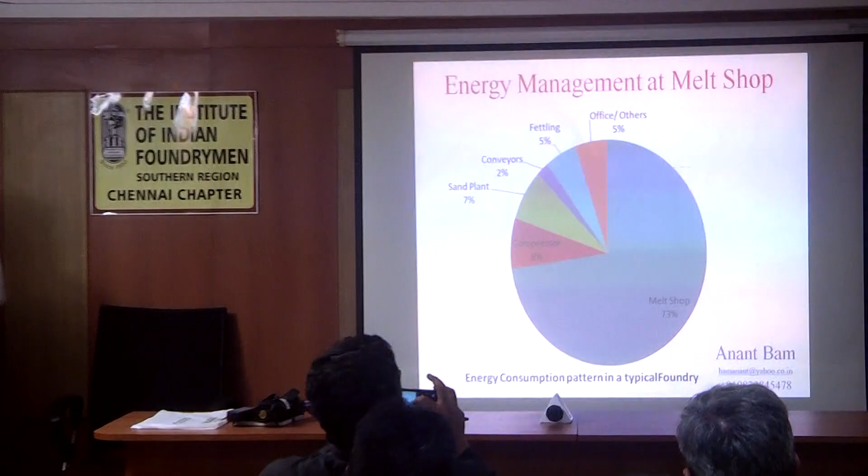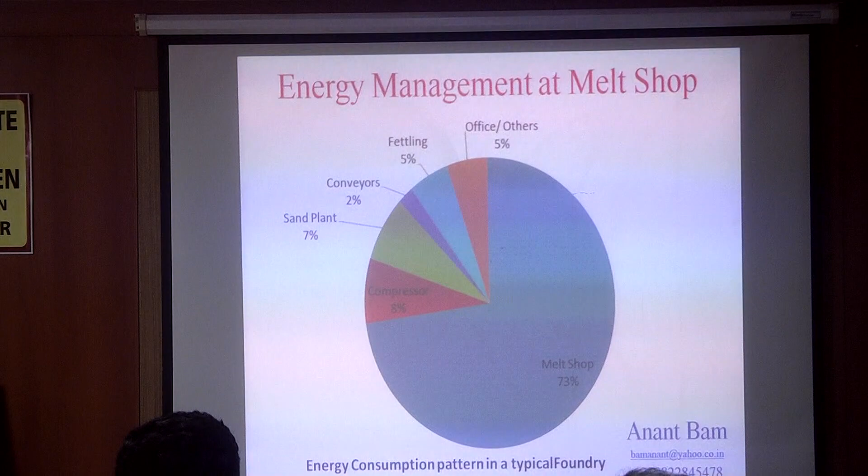Usually there is a misconception that whatever units are consumed for liquefaction are recorded on the panel. No, sir. To run the panel, there is energy requirement. To keep the furnace cool, there is a pump house. To cool that water, there is a cooling tower. All these things together contribute to the melting energy.

So as we have seen, melt shop is a low-lying fruit because it's a 73% contributor to the total energy consumption. So if we can save something here...

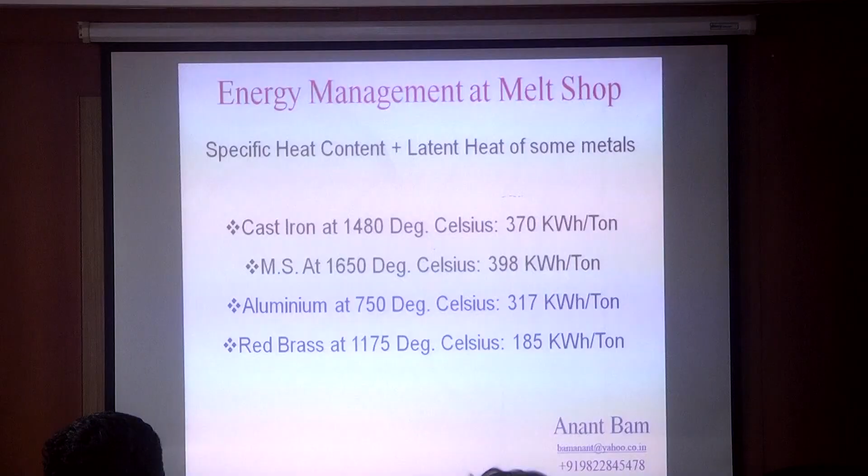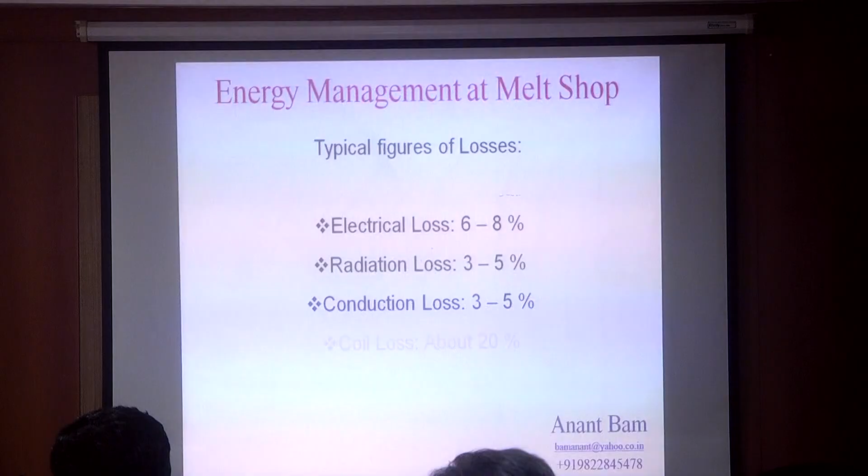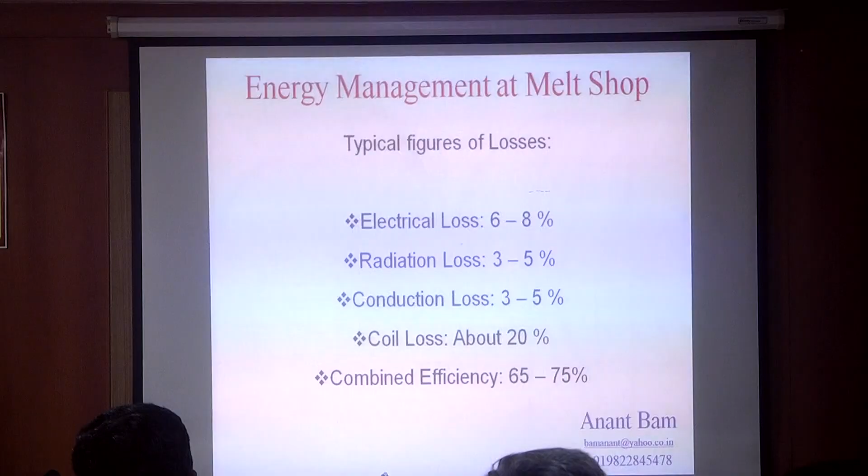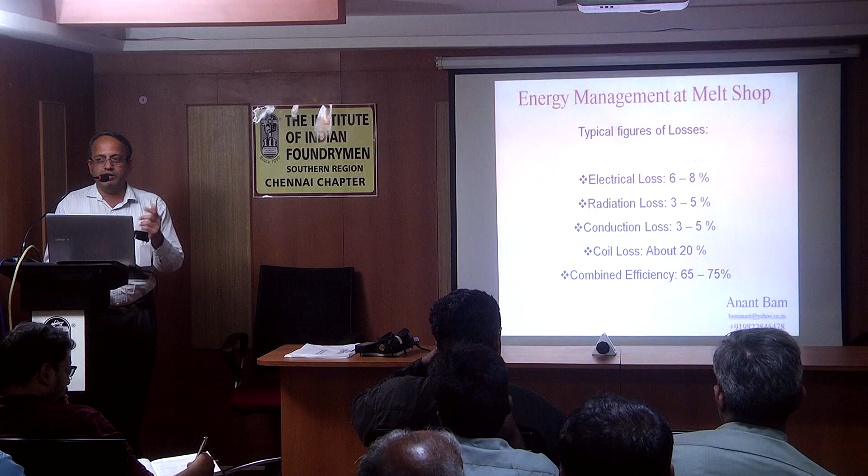So where does the remaining energy go? Because even in the most efficient foundry, figures are 200 units plus. Electrical loss 6 to 8%, radiation loss 3 to 5%, conduction loss 3 to 5%, coil loss about 20% - this goes to the cooling water. Combined efficiency becomes 65 to 75%. Add to it the energy consumed by the pump and cooling tower fan. Because electrical loss here means the loss in the panel itself, but to run it we need these two auxiliaries - the pump house and cooling tower.

Lining condition. First of all, there are two aspects to it: quality of lining and lining condition. Lining takes up 8 to 10 hours during sintering, so forget about production loss - the energy consumption in lining or sintering is equivalent to nearly 3 heats of energy consumption or more, but it can be done in as minimum as 3 heats. So you are wasting energy for 3 heats and probably a production loss of maybe 8 or 10 heats. That is a tangible figure. Production lost, you cannot cope up again - you have to work hard and hard to come to that figure. So you can quantify that and then allot it to the number of heats sustained by the lining.

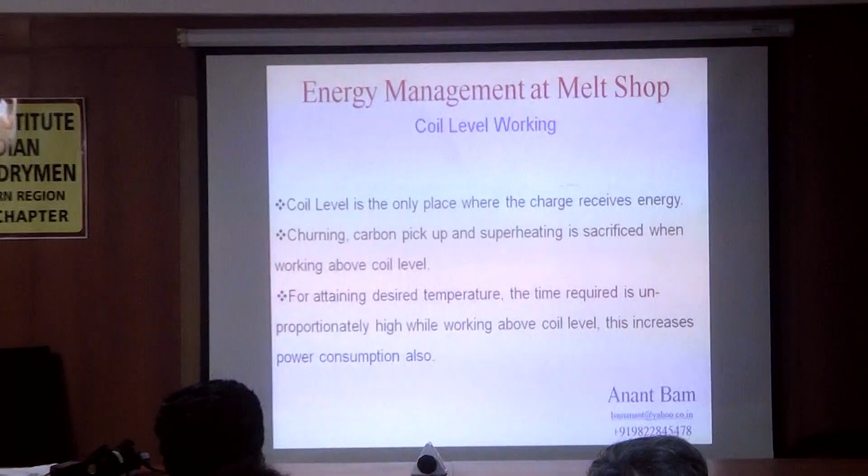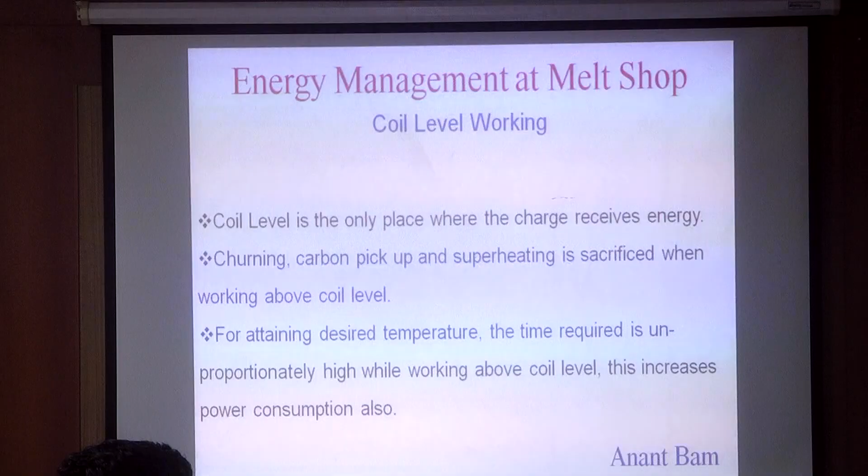Coil level working - that's the only area which receives energy, not below it, not above it. So if your coil is placed much above, the bottom remains cold. If you are charging too much metal by raising your crucible height above the coil, that remains cold, and the energy is received in the middle.

So whatever is within the coil, it receives energy efficiently. And if you try to increase your holding capacity or dispensing capacity by raising the lining height, then you are not only delaying the heat, you are also consuming more energy. Occasionally, to adjust one or two odd jobs which really require 100-200 kg excess metal, it's all right. It's pardonable - but I again use the word pardonable, not acceptable.

So it's a commercial decision. Instead of holding and doing something else, you can raise it for maybe 100 kg or so. But don't make it a practice.

Charge material - again, it's a commercial question, I would say techno-commercial. Clean charge material gives you best results, because unclean charge material - dirt, dust, oxide, whatever it may be, grease, sand stuck to the runner riser - it's something else which you don't want in liquid metal. It's occupying the volume of furnace. It's taking energy from the electricity which you are supplying to take it to that temperature, because specific heat capacity of sand is larger than specific heat capacity of iron.

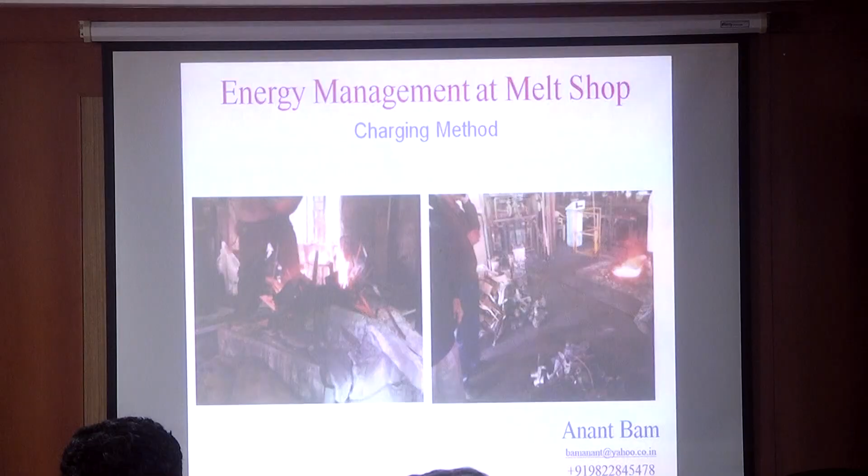The photo on the left hand side is loose scrap being charged. All these photos are not from Chennai, these are old photos when I was conducting Urja Sanchay 10 years ago. Wherever needed, I will take the name of the foundry which allowed me to do that exercise.

Cold start cycle. Mr. Venkat will be talking more on it. But if you cool the furnace fast, the cracks developed are shallow.

So it is ready to heat up fast. So your cold start cycle timing reduces drastically.

As against, if you allow the furnace to cool gradually, the cracks which develop are quite deep, so those cracks take a longer time to seal. So naturally your cold start cycle timing increases. Again, that's a time loss and energy loss.

Luckily, I could have a comparator - what was the cold start cycle before creating awareness in my last Urja Sanchay, and what is the cold start cycle now. This foundry number belongs to those particular foundries which were selected 10 years ago, which were repeated last year.

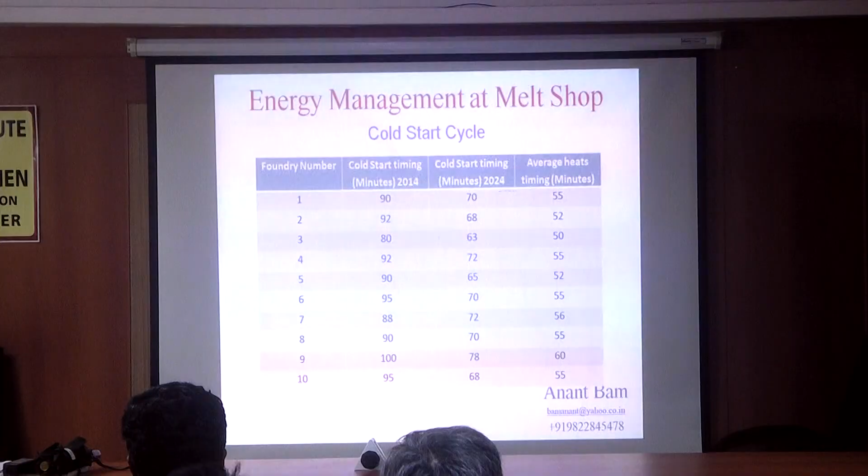So the same foundry, same panel, people have changed - maybe the melters do not remain at one place for more than 2 years. But the practices change. After educating them, you can see the average saving in the timing.

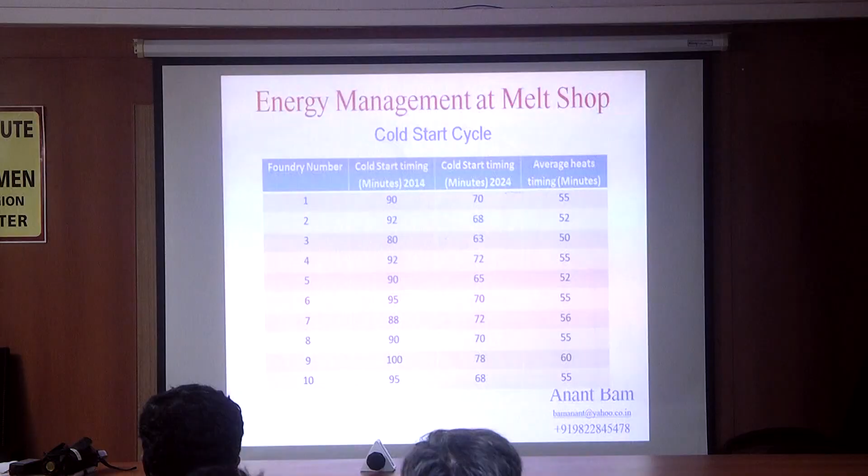Superheat - 10 degrees, 3 units. Keep it in your mind, every 10 degrees, 3 units more. Do I really need to superheat?

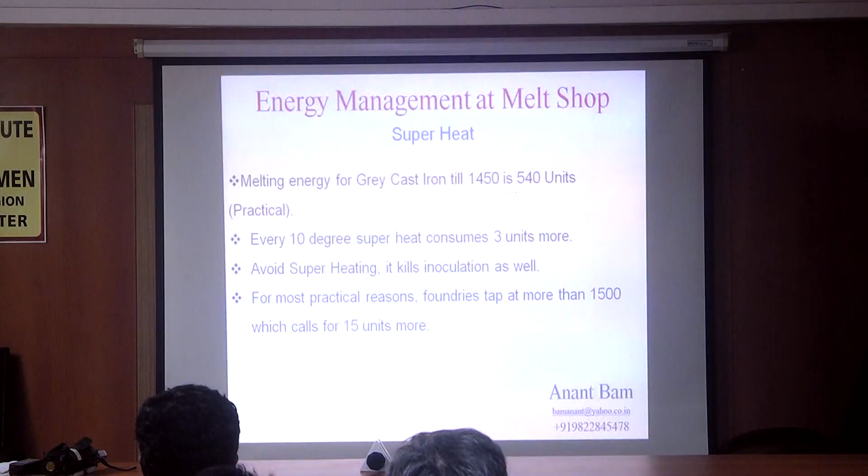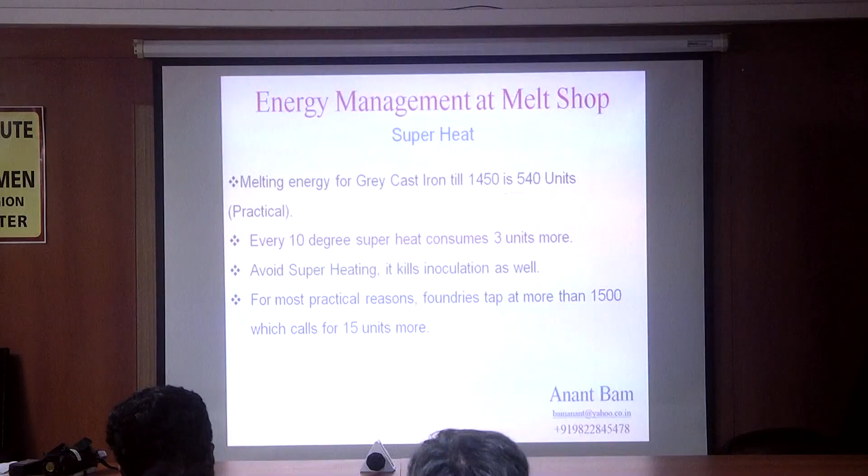What's the need? First is loss in transfer. Can I preheat the ladle? Certainly yes. That will reduce the need of superheat.

Can I reduce the travel time? Certainly yes, that will again reduce the need of superheat. Can I cover the ladle? Certainly yes, that will prevent radiation loss.

Sometimes superheat is necessary, but then take care of it by preheating the ladle, by minimizing the travel distance, and by always covering the ladle.

Excess holding time - 10 minutes holding, 20 units extra, 2 units per minute. In this visit, this was an example I gave to people. There was a debate, but later on they agreed to it - yes, we can do something about it.

And you go on reading all these reasons - can it not be avoided? Certainly yes, if it is a team effort.

But what happens? Today in every foundry, melting shop is enemy of molding shop. Core shop is enemy of both. And production planning person is the villain.

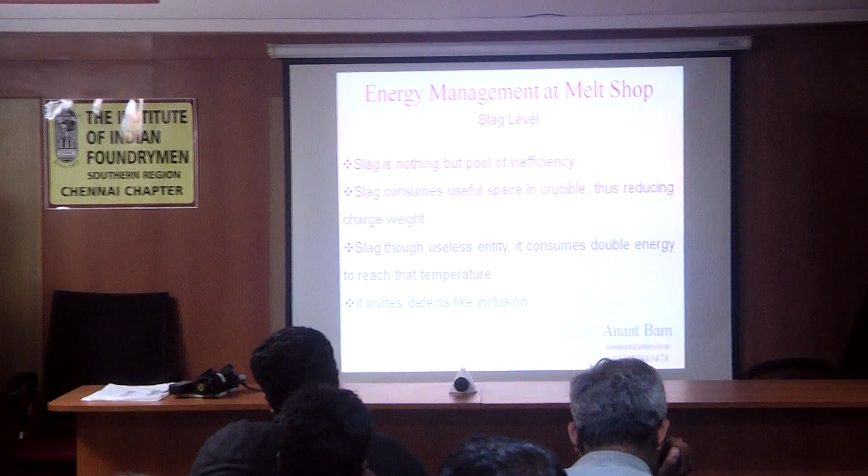Recipe - what's there in the tadka? Oil, then what? Fennel seeds, mirchi, spices, onion, potato - end of it. What do we have in our tadka? Liquid metal, ferrosilicon, ferromanganese, copper, tin, chrome. End of it.

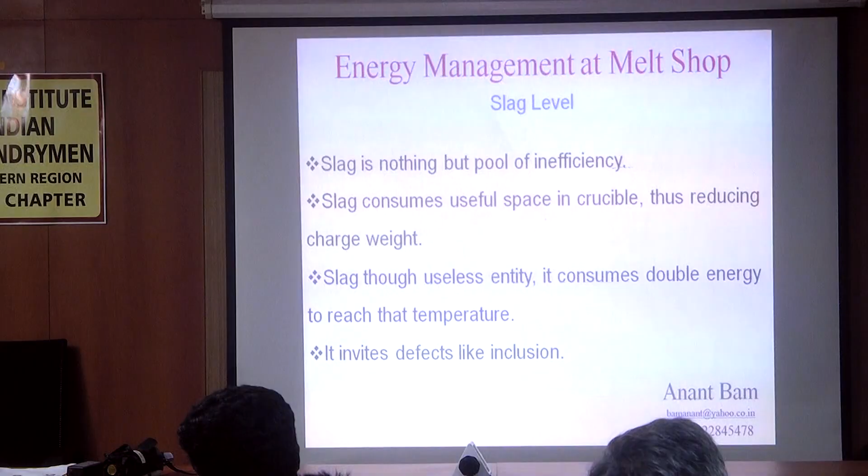If that lady can take care of her percentages, why not we? She is not supported by a PC or a spectrometer. We are. But even then we fail. Learn from it.

Before thanking, I would like to share my first-hand experience about this visit. I could find lakhs of units being wasted that could be saved just by preventing compressed air leakage. What does it call for? Awareness. Remember, a 1 mm hole in a compressed air line leads to 2 CFM loss.

And while at lunchtime, if I am walking through the shop floor, I can hear hiss, hiss, hiss. What's it? What for?

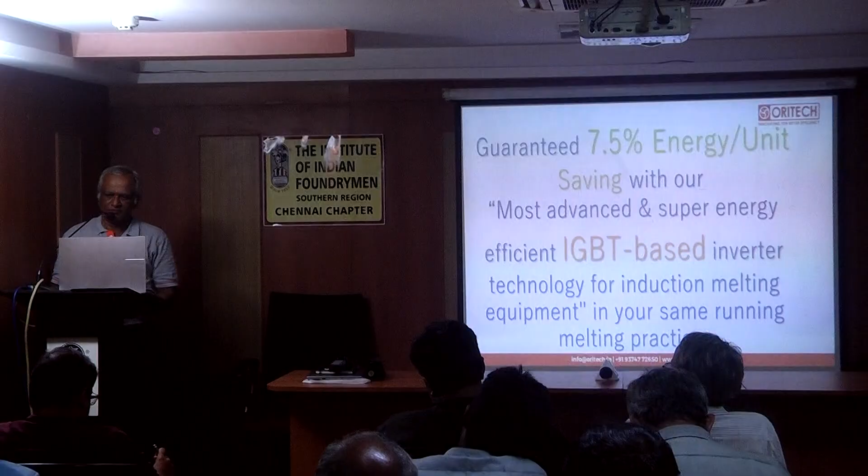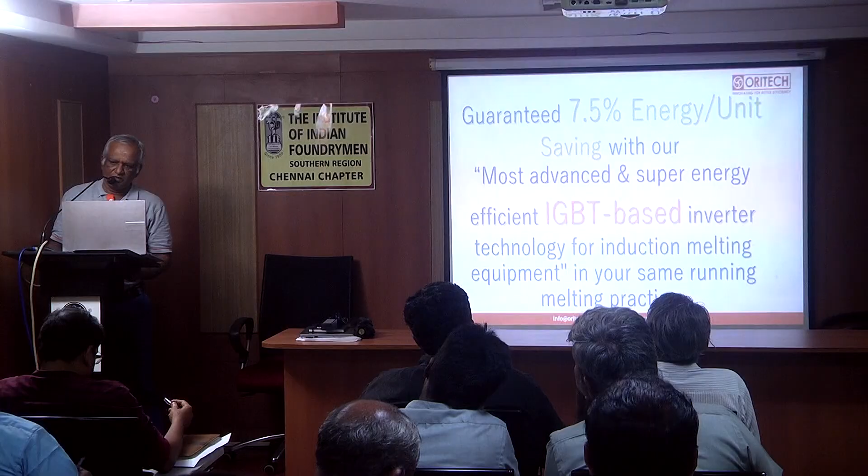Thank you for this good evening and a wonderful opportunity. This is Oritech. We started our company in 2006, and now we have more than 350 to 400 installations. We started our company with IGBT technology. Our USP is a guaranteed minimum 7.5% energy saving with your existing melting practice. We are achieving this through our technology, design and concepts. I want to discuss and explain all these things.

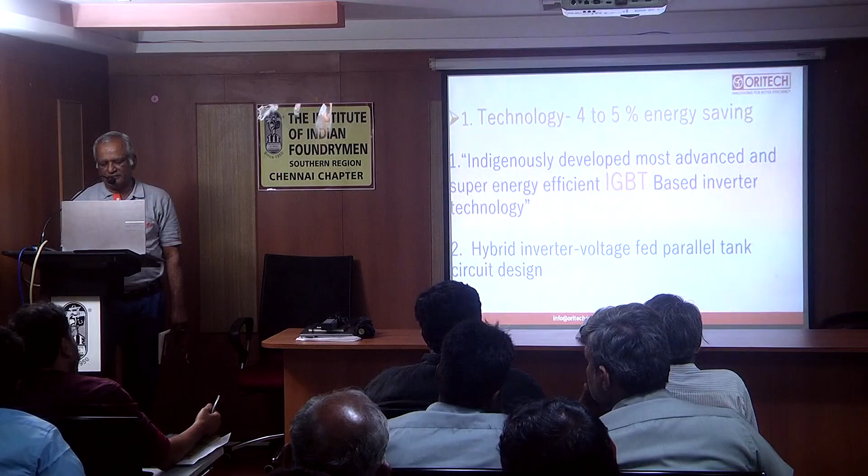We are using IGBT technology, which is very fast switching compared to SCR, and we are also making hybrid inverter technology. In the world, this is IGBT - insulated gate bipolar transistor. What is the difference between IGBT and SCR? SCR is silicon controlled rectifier, and it is controlled by current. IGBT is voltage controlled, meaning like a switch - you don't need any snubber, you don't need any turn-off time. Through IGBT technology, we get speed switching power of more than 100 kilohertz.

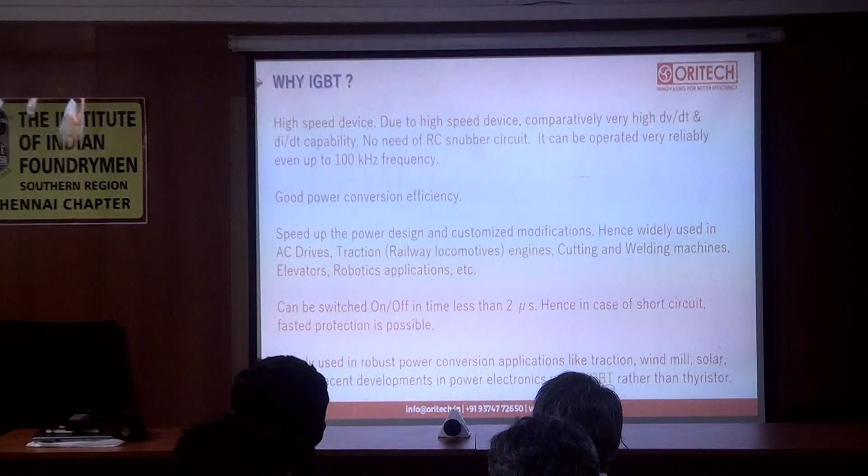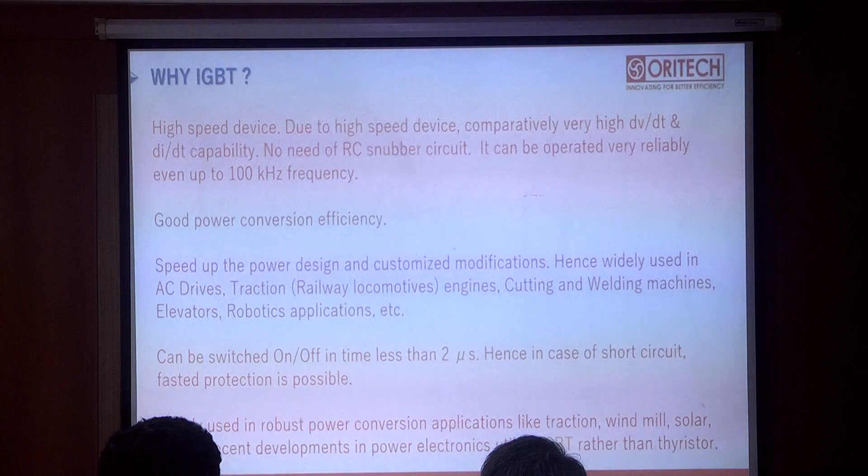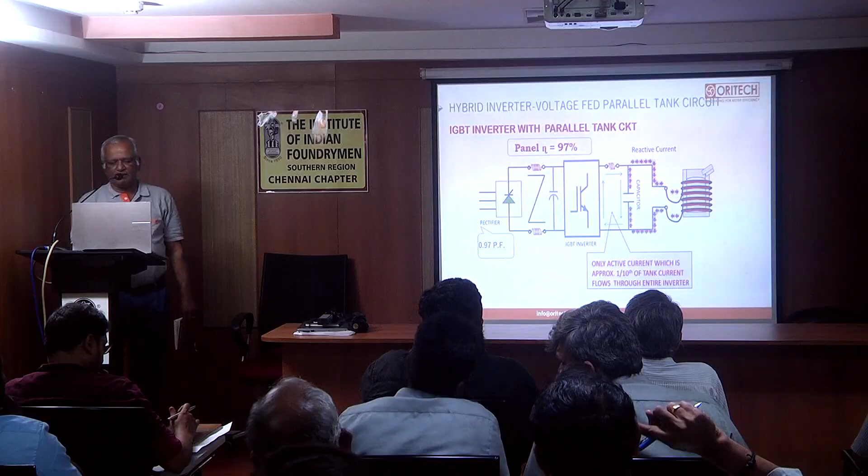With this speed switching technology, we have also introduced DSP technology - digital signal processing. The IGBT has 100 kilohertz switching power. We are switching the IGBT at more than 100 kilohertz, and with that we are controlling the power. This is our inverter power circuit.

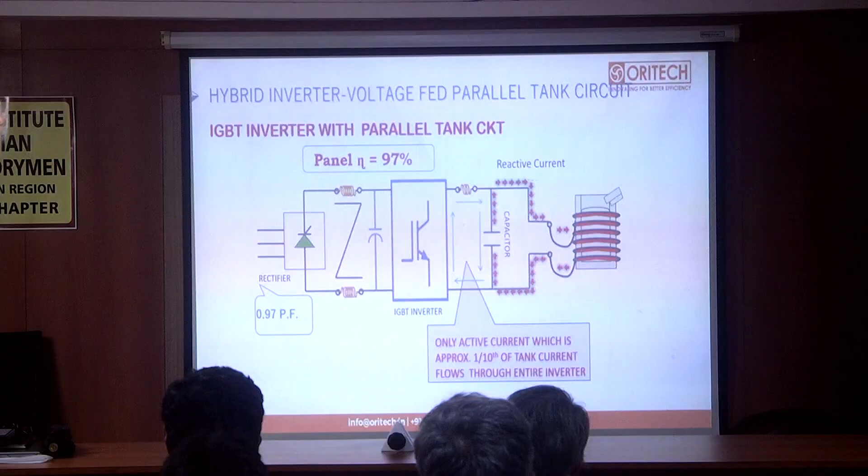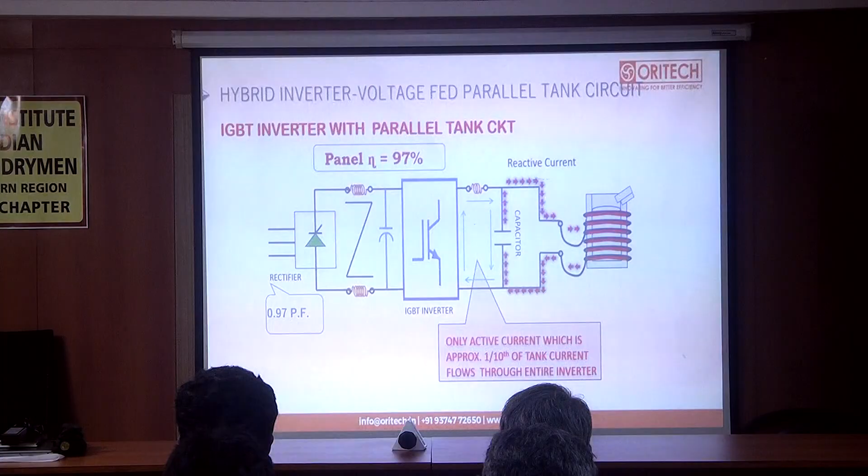In the world there are only two technologies: current fed and voltage fed. In current fed, we are controlling DC voltage, so it affects our power factor. Whenever you reduce the power, operating with less power, you get affected power factor as well as harmonics - generating more harmonics. In voltage fed technology, the DC is switched on and they control the power through frequency.

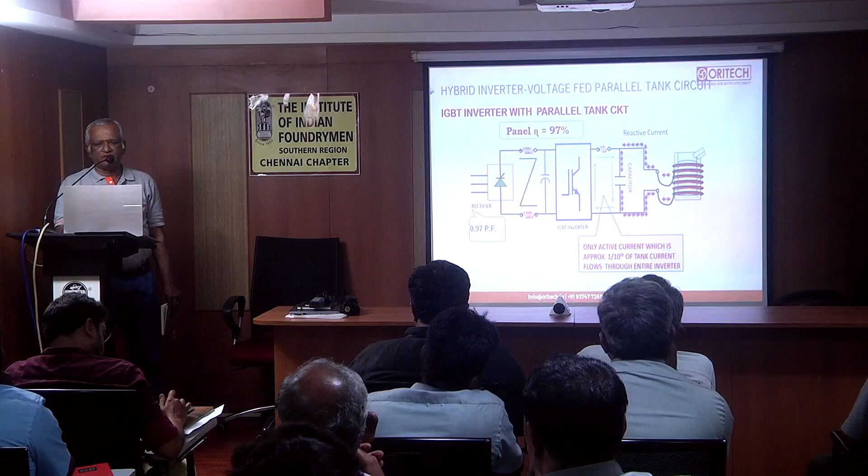So you see the benefits of Oritech hybrid inverter design. I already told you the types of inverters we have: voltage fed, current fed. How is it working? Hybrid technology.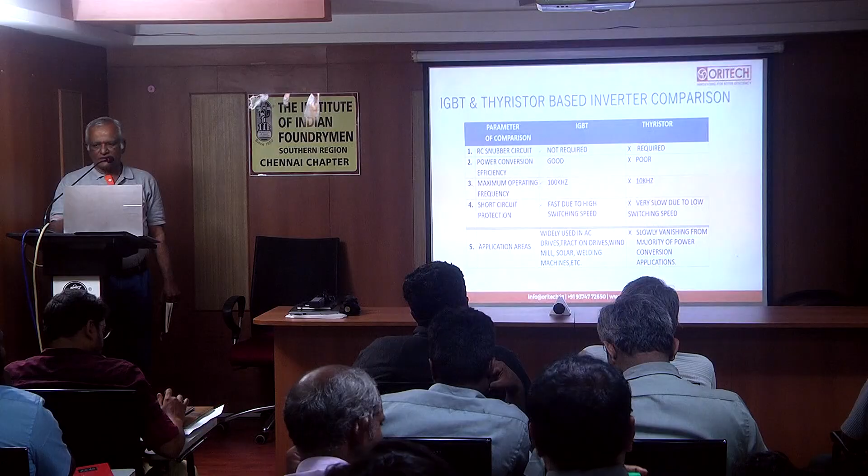What is the difference between IGBT and thyristor? Thyristor requires an RC snubber - it wastes power. Power conversion efficiency is more in IGBT because we don't need a turn-off time circuit, and it operates at very high frequency. Short circuit protection is very good because we use DSP technology. That's why IGBT is used nowadays in Vande Bharat trains, as well as every AC drive, every welding machine - everywhere we are using IGBT.

Through this technology we are saving a minimum of 2 to 2.5% energy.

Now our layout - you can see many more furnaces, many more power supplies, and lots of copper bus bars going through here and there. As already mentioned, we have very heavy I-squared-R loss because of frequency as well as the bus bars, so it heats up and we have a lot of loss. To reduce that loss, we shifted our reactive power near the coil.

In our panel, up to 350 kilowatts we are not using water cooled cable - only air cooled cable. For very big furnaces, more than 5 ton, we use only 1.5 meter of water cooled cable. With water cooled cable, you get more than 6% power. Here you see our installation - very neat and clear, no bus bars, nothing here.

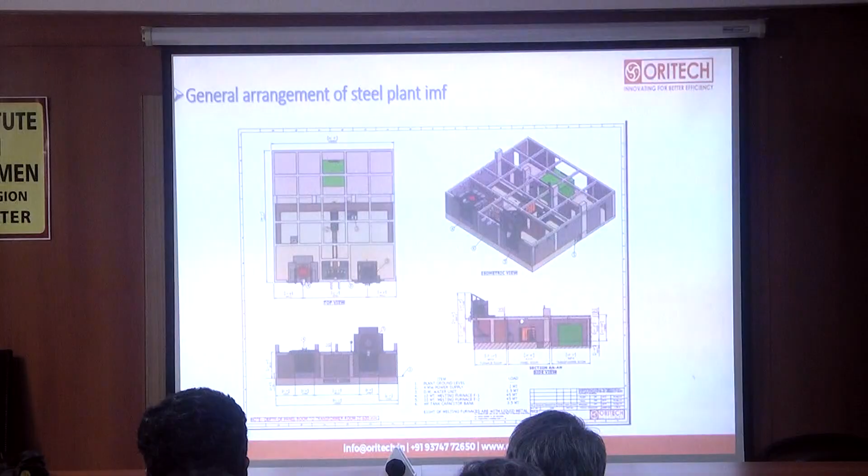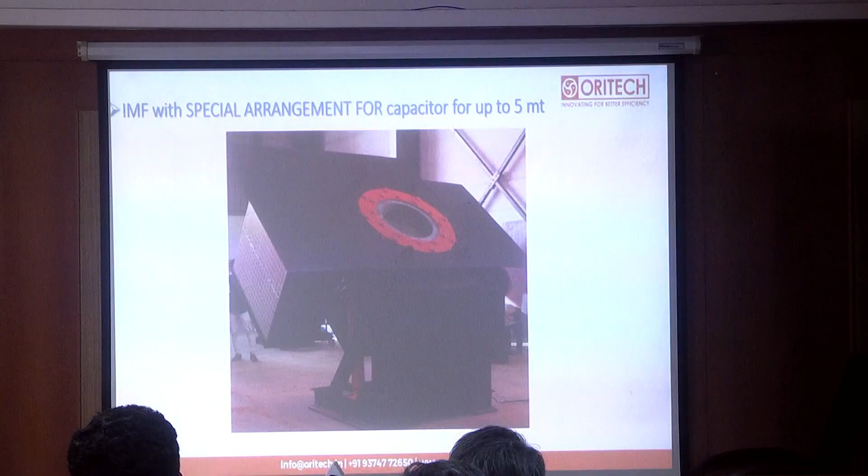This is our furnace. Our furnace is combined - all the furnaces, steel frame furnace combined with tank capacitor. Because of IGBT, we are making the parallel tank circuit near the coil, and that's why we are saving energy through saving reactive power. Since all panels contain their tank capacitor inside, instead of using longer copper bus bars and trench bus bars which cause more I-square losses, we are putting our capacitor parallel to the furnace. So there is no need to worry about component failure or water-cooled failure, and it gives very less maintenance.

Build quality saves 0.5 to 1.5% energy. Here, from 500 kg, we are making steel frame furnace only, not box furnace, because with a box furnace we cannot save energy. Due to using the core, we are saving 1.5 to 2% energy. But with a normal core, we can save maximum only 0.75 to 1% energy.

We use the same CRGO core but with high quality - our competitors are using only 125 rupees per kg core, but we are using 400 rupees per kg core. That is called amorphous core. Amorphous core means it acts at very high frequency and works very efficiently. We are using amorphous core, which is very thin.

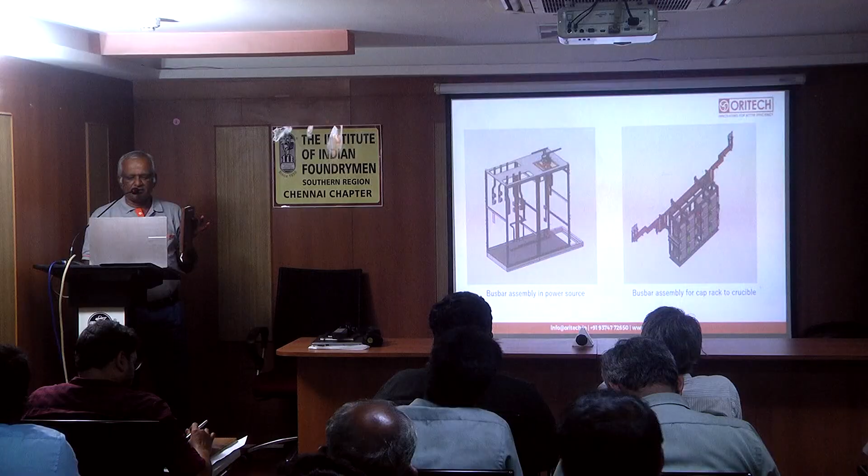In our furnace, if you see, there is no cooling at all on the core side - inside the core there is no cooling. But if you see any other furnace, any other kilowatt steel frame furnace, they definitely provide cooling side copper plate. Through this, we have reduced our bus bars. Here we have assembled the panel bus bars - inside the panel, these are all the bus bars, and this is our capacitor, tank capacitor assembly.

So sir already told about the radiation loss and other losses. Through this, we guarantee a minimum saving of 7.5% energy. But if you do more practice with this existing advice, we can save more than 10% energy. 7.5% energy means for 500 kilowatt, minimum 36 kilowatt hour per ton we can save per melt, melt to melt.

Now we are installing our panel - 6000 kilowatt, 6000 kg dual track furnace in Sandfits, Coimbatore, which is a cast iron foundry. And at Kejriwal Industries, Kolkata, they are achieving 490 units kilowatt hour per ton through our 5 ton, 3000 kilowatt dual track unit.

So we may be new, but we are doing a lot of work. We have more than 350 to 400 installations in steel plants. Now we have more than 10 orders around Coimbatore in steel plants, but we need opportunity in foundry. And we are also supplying dual track IGBT to Kirloskar Ferrous.

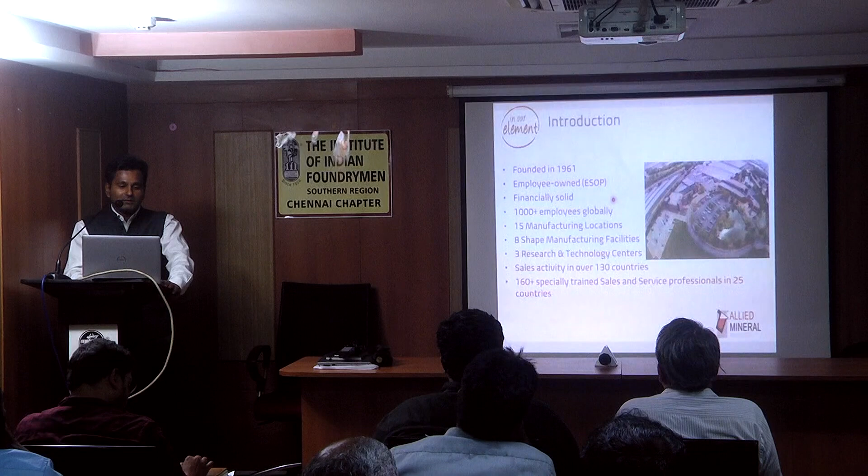Our company introduction, Allied Mineral Products, has been founded in 1961, and it's an employee stock ownership program company. It's an ESOP company, financially solid, and we have 1,000 plus employees globally. We have 15 manufacturing locations. Recently we started a manufacturing location in Turkey, and we have 8 shape manufacturing facilities around the globe, and 3 R&D centers, and actively sell over 130 countries plus, and we have 160 plus sales representatives along the globe.

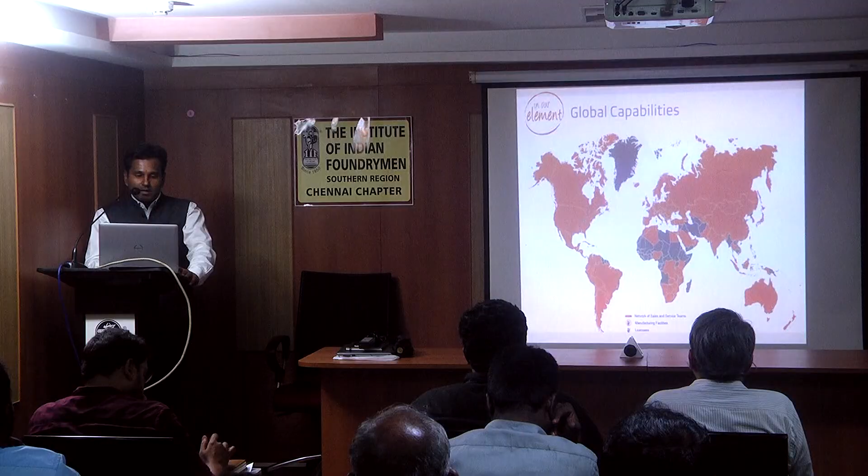This is just a pictorial representation of our company's presence over the globe. As you can see, we are present in almost every country. These locations are our manufacturing and licensing locations.

So what is the relevance of lining life and energy saving? As Anand sir has explained, optimum lining thickness always gives you better energy saving. So increased lining life reduces the overall power consumption of the throughput. As I said, sintering heat consumes three times your regular power consumption of your regular heats. So if the lining life is prolonged, this additional sintering power is distributed over the extended lining life.

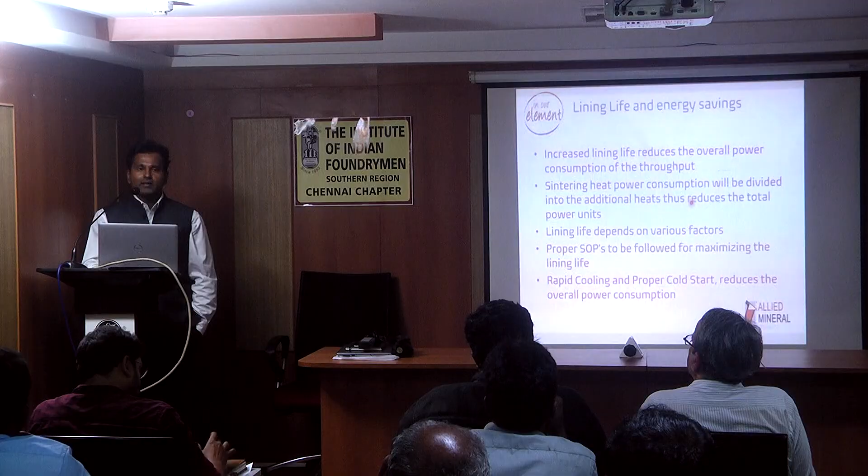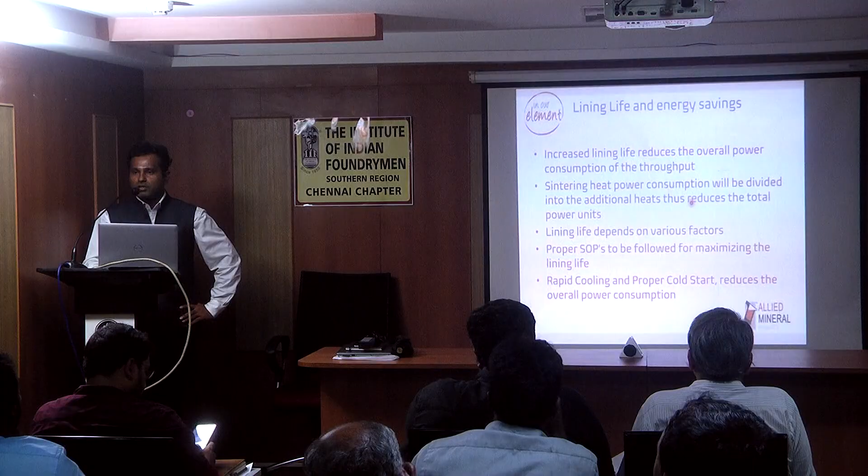Lining life depends on various factors, so we cannot have a constant lining life even in the same foundry. Lining to lining life differs, and company to company, foundry to foundry lining life differs. It all purely depends on our practice, how we handle the lining efficiently. If we properly follow all standard operating procedures, we can definitely maximize the lining life and make the maximum out of the lining. A rapid cooling and a proper cold start - these are the two things I will be discussing in further detail.

I've just kept 2-3 segments instead of going completely deep. If we consider these 3 parameters, we can have maximum life. One main thing is grout lining. Grout lining is generally not given the importance it has to be given.

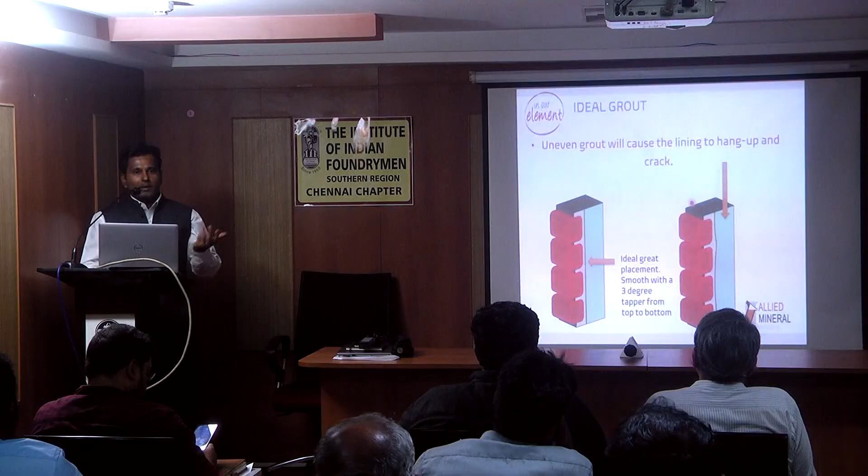What is the purpose of grout? The purpose of grout has two main purposes. One is to give smooth expansion and contraction for your main working lining. Second, it insulates in between the coil. Ideally, the grout has to have a 3-degree taper from top to bottom, and it has to have a very smooth surface.

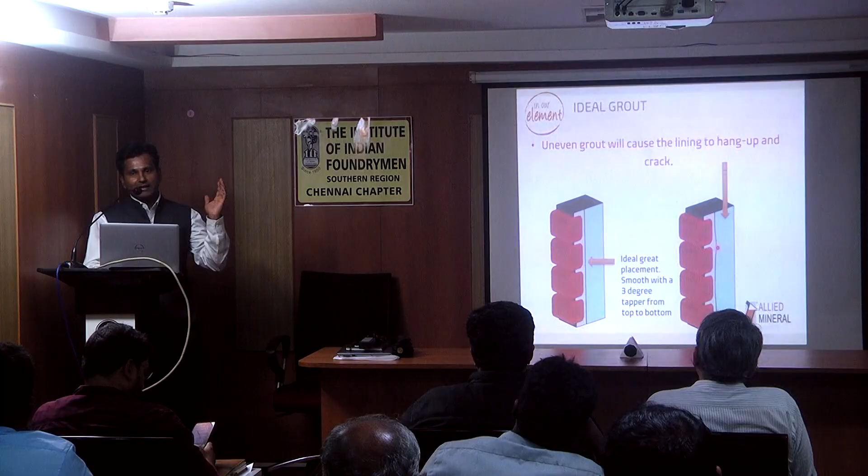If your grout is not smooth enough, if it has any ups and downs, when the lining tries to expand, it gives stress to the lining, and further it gives cracks to the lining. It will reduce your lining life. I've given one example of a bad grout.

Here you can see these are all the lining hang-ups when lining tries to expand and contract. From the back, it will try to create stress. Further, it will have a horizontal crack. A horizontal crack may not be sealed even though you do a proper cold start. Only vertical cracks or through cracks can be sealed if we do a proper cold start.

The second thing is spout lining. Generally, the spout is lined with a different material rather than the working lining. Either sodium silicate or some other binder will be added, and it will be placed after doing the lining. We recommend doing the spout ahead of the lining. This gives you two advantages. One is that your joint is shifted from this particular location to this location.

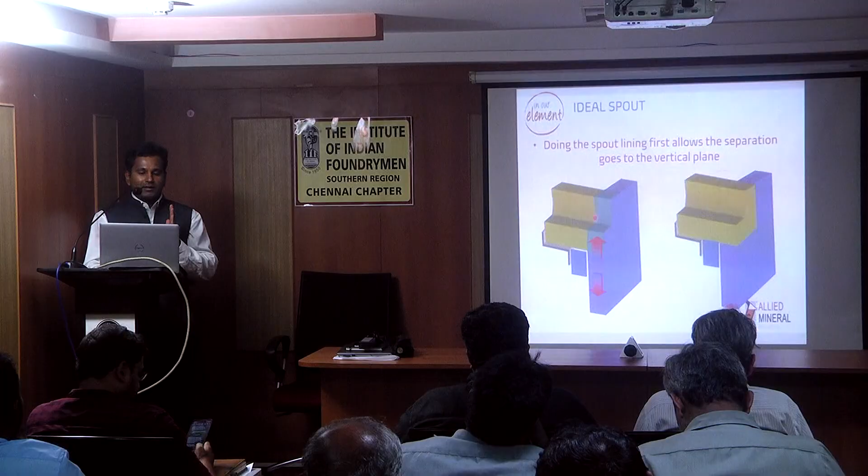We call it a vertical plane design. So now in the vertical plane design, these two have become completely different entities. When the lining tries to expand and contract, it will not disturb your spout. In the other case, in general conventional practice, people put spout lining on top of the main working lining. Spout refractory and the main working refractory have different expansion rates. When the main working lining tries to expand, it will try to push the spout lining, and when it contracts, there will be a separation, so it doesn't seal properly because of the expansion ratio.

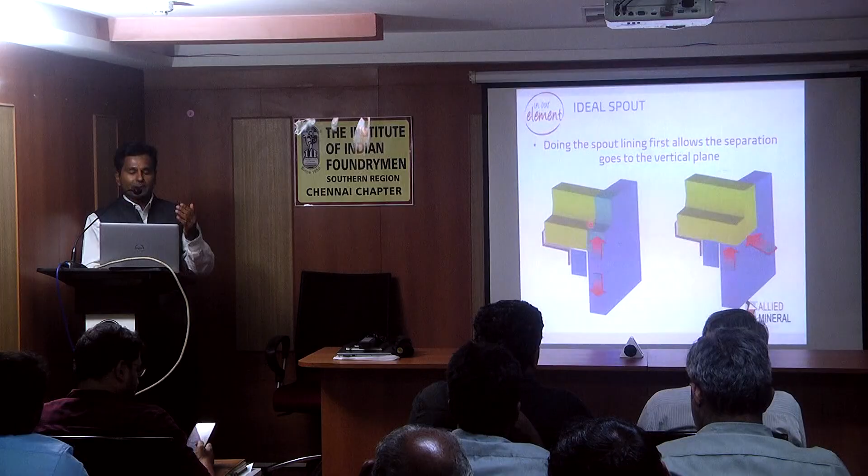So what happens is this particular joint is always in metal contact. There are high chances of metal getting penetrated through the spout and main working lining, giving you a GLD trip. So if we do the spout early, the joint is shifted from here to here, so there is less chance of metal getting penetrated through the spout to the coil.

In these two pictures, you can see the difference between the vertical plane design and the other design. Here the joint is very clearly visible. We can even patch it even though metal is present inside. In the other case, you have to completely demolish it. From a maintenance point of view also, this particular design is always safer.

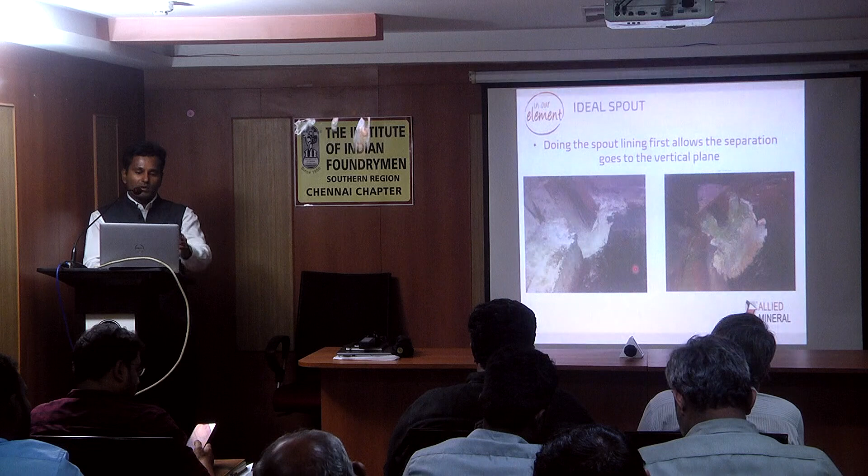We recommend a plastic refractory with a chrome oxide addition. This chrome oxide will give you the added advantage of non-wetting properties, so the metal and the slag don't stick to your spout, and even if the metal is getting solidified, you can easily remove it without damaging the lining of the spout.

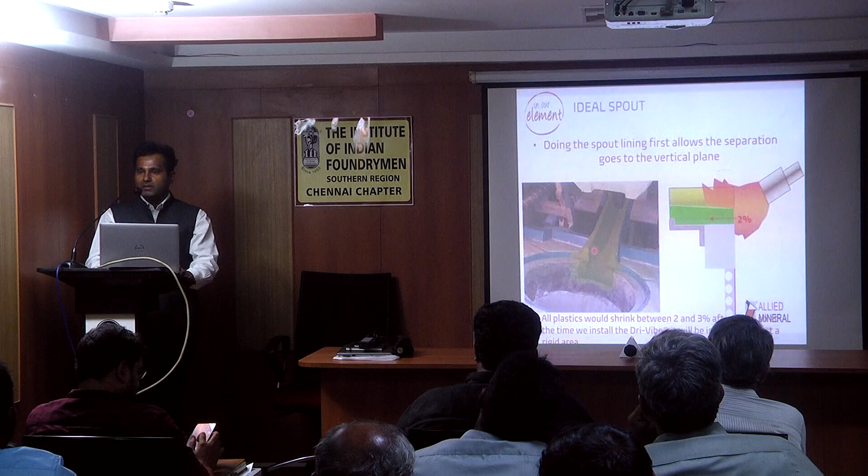If you use a plastic refractory, it always has some moisture of 2 to 3%. This moisture has to be eliminated before we introduce the main working lining. If you are not heating the spout before your lining, the moisture will affect your main working lining, and also when you try to shrink during sintering, there will be a separation because of the shrinkage. So there are chances of metal penetration, leading to your lining failure earlier.

Another aspect I would like to cover is the top cap refractory. The same way we dealt with the spout refractory, people used to do with the top cap. I've given a couple of examples. This is how generally maximum foundries will be having the top cap. They will be using the main working lining with some binders and try to form a heap on top of your top block, and because of the thermal shock from top to bottom, there will be a lot of cracks in this extended top cap. So we recommend using a dry top cap, which has an additional binder to take care of the impact of your charge and the thermal shock.

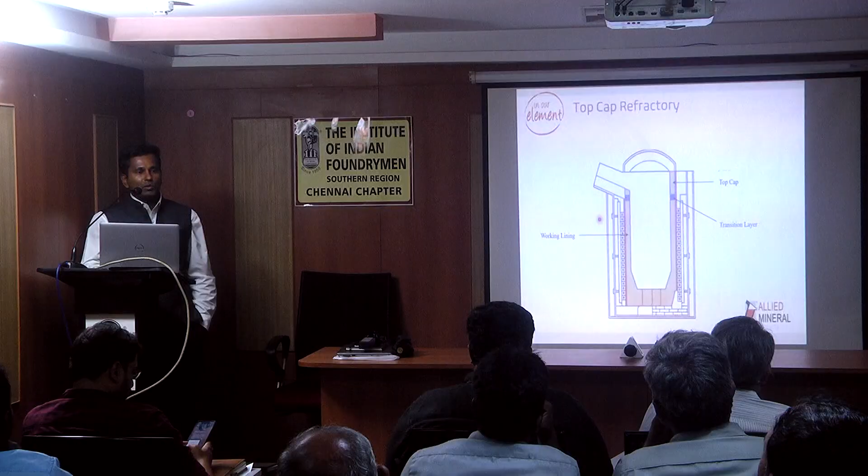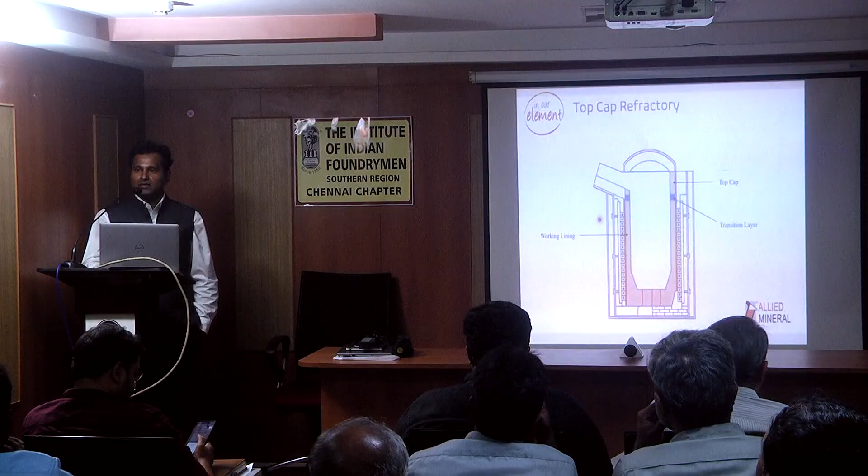This is achieved by adding fused silica. Fused silica is a better thermally stable product compared to normal silica. So with these two ingredients, we can achieve a better strength and better thermally stable top cap, even though it is dry.

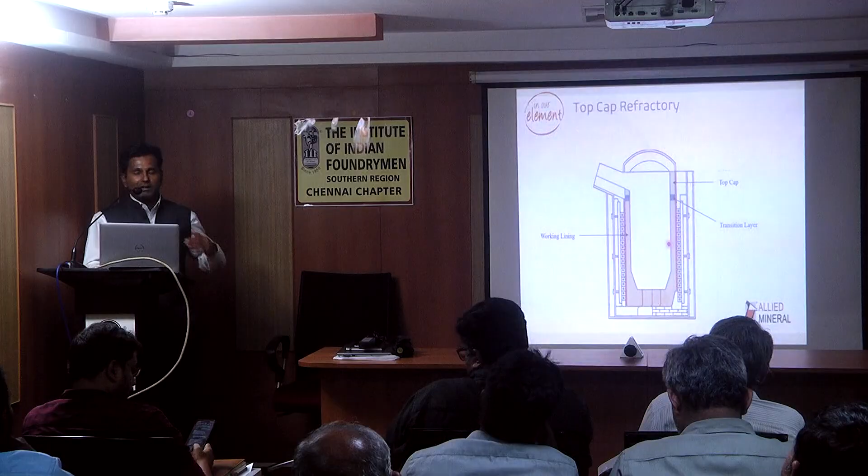So how do we have to install it on top of your power coil level? You have to make one transition layer with the special top cap and your main working lining around 2 to 3 inches, and on top of that you can install this top cap material. This will allow a homogeneous mixing from the working lining till the top block level. We always recommend having your top cap only till your block level, not forming any additional heap kind of structure on top of your top block.

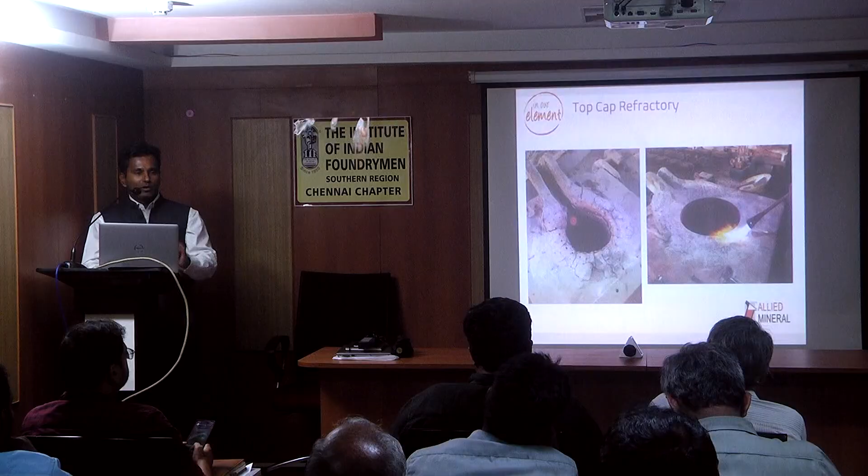Now we'll talk about sintering, how sintering will affect your main lining life. Refractory understands only the temperature, so it doesn't understand the kilowatt reading. But as an age-old practice, people used to follow the on-off cycle and slow heating cycle. But how much kilowatt is giving you what temperature, nobody knows. So we have to do an initial sintering based on the thermocouple values.

Depending upon the furnace size, we recommend either 1, 2, or a maximum of 3 thermocouples. The thermocouple has to be placed at the bottom, at one half of the furnace, and at 3/4 of the furnace from the bottom.

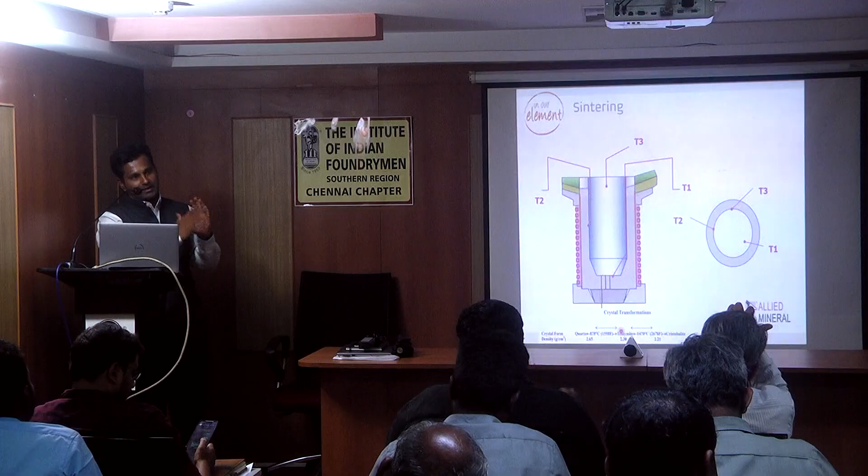We recommend 110 degrees Celsius per hour rise for the silica, and 222 degrees Celsius per hour for the neutral ramming mass. Silica has a phase transformation - around 870 degrees Celsius, it transfers its phase from quartz to tridymite. So we recommend giving a particular amount of soaking time around 900 degrees Celsius, so that it has time to transfer its phase from quartz to tridymite. And on final holding, it will transfer its phase from tridymite to cristobalite.

Sir has already given the proper numbering for how much volume a pipe and other things will occupy. Not only for the sintering, we always recommend having a densely packed charge to draw more power instead of power wastage.

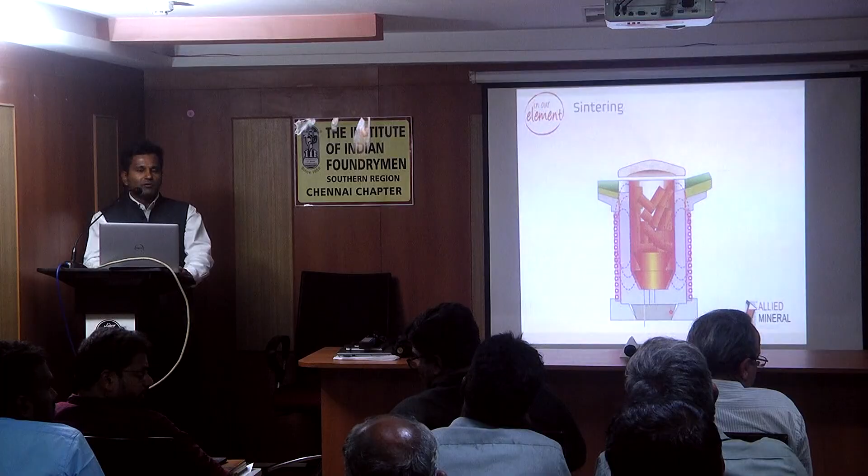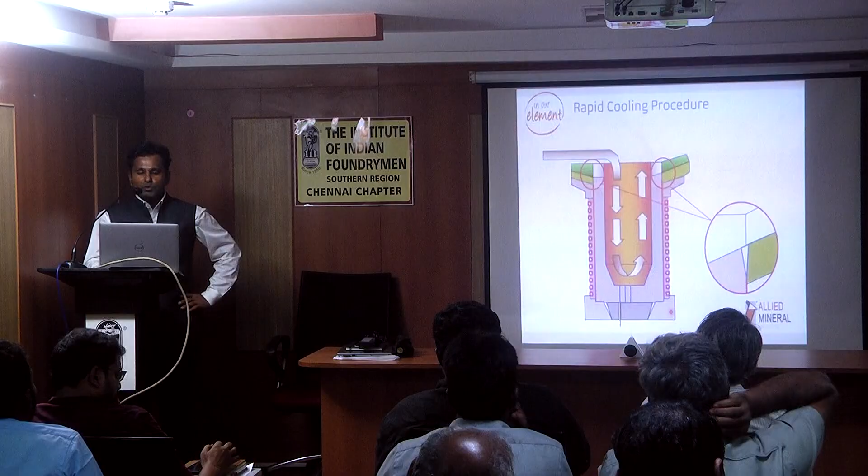During the sintering heat, the metal level has to be till the top of your top block, and for subsequent heats, you can have your metal level till the power coil level.

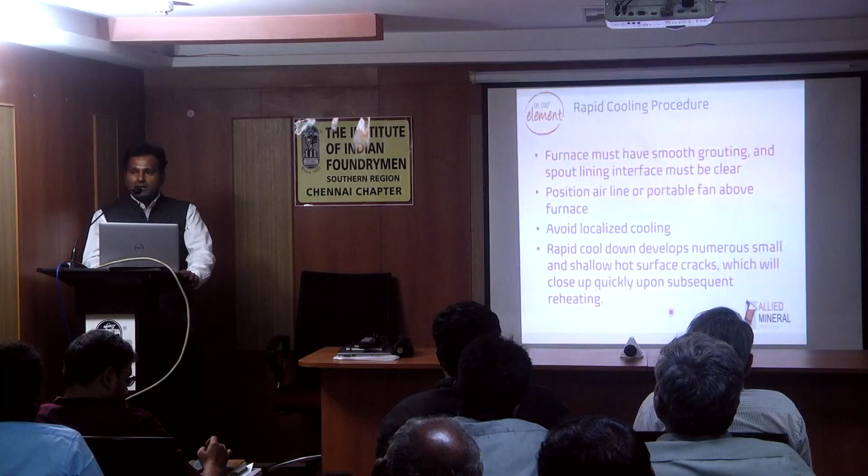So, rapid cooling - generally people used to have a different school of thought. They think that if cooling is slow, thermal shock is less, so they will be having a better lining life. But we recommend rapid cooling. When you do rapid cooling, there will be many cracks, but the cracks are not deep enough.

It's very shallow. When you do a proper rapid cold start again, these shallow cracks will seal automatically with lesser heat. For this rapid cooling, the furnace must have smooth grouting and the spout lining interface must be clear. Position an airline or portable fan above the furnace, avoiding localized cooling. Rapid cooling develops numerous small, shallow hot surface cracks, which close up quickly upon subsequent heating. So this is like a two-method we can do.

You can have a duct on top of one side, so that air can be circulated from the left towards the right.

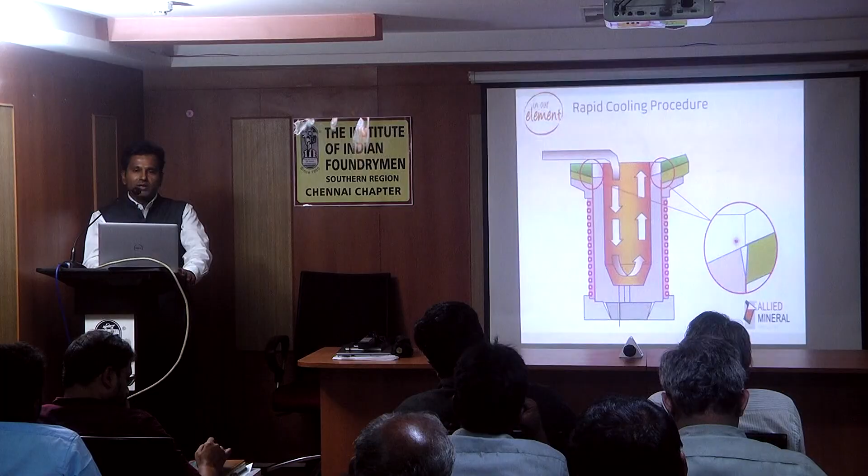Whenever you do this rapid cooling, the joint between the spout and the main working lining has to be cleared off. If there is any solidified metal or slag stuck in the joint, it will not allow your lining to cool down or contract further, so it will create a problem. You have to chip off the slag or metal present in the joint before doing the rapid cooling. Another way is to use a fan for rapid cooling.

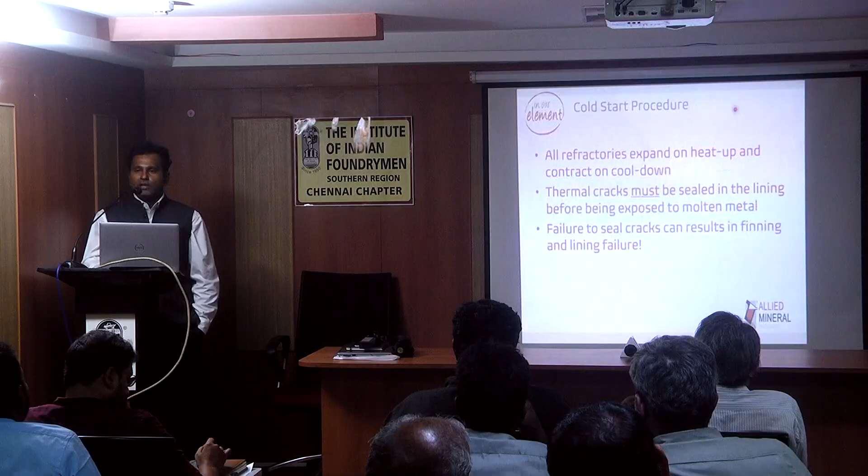All refractories expand on heat up and contract on cool down. These thermal cracks have to be sealed before being exposed to the liquid metal, and failure to seal cracks will result in finning or lining failure.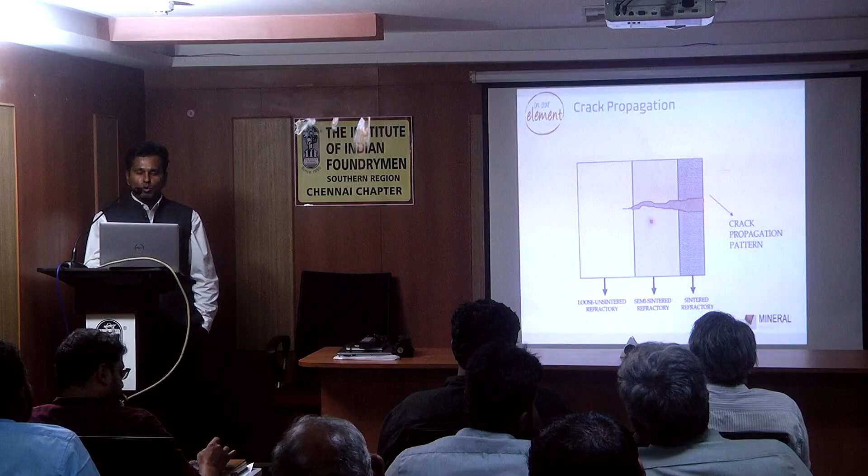This is how crack propagation starts. It will propagate from the hot face, slowly enter the semi-sintered refractory, and go to the loose back-up. Metal expands 3 times more than the refractory.

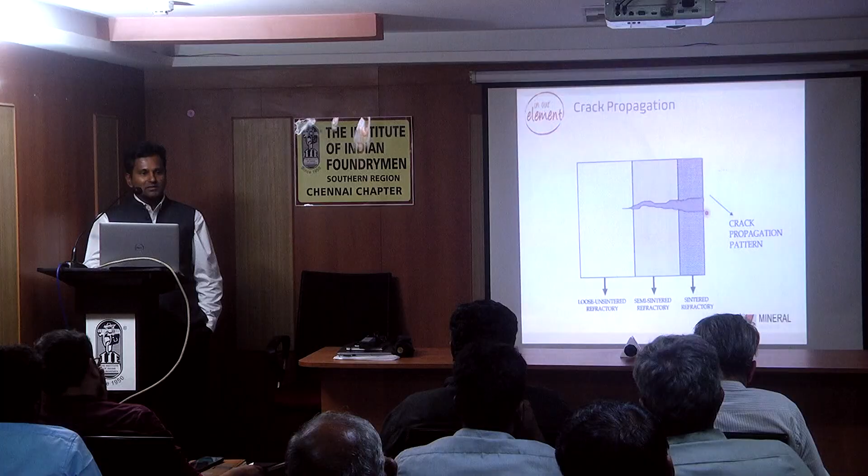Whenever a fin is already present in your lining system, it will move towards your coil very fast, which will lessen your overall lining life.

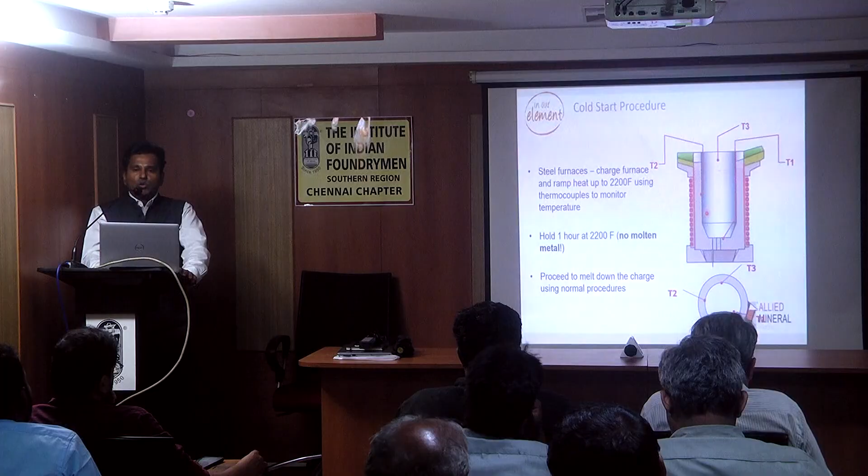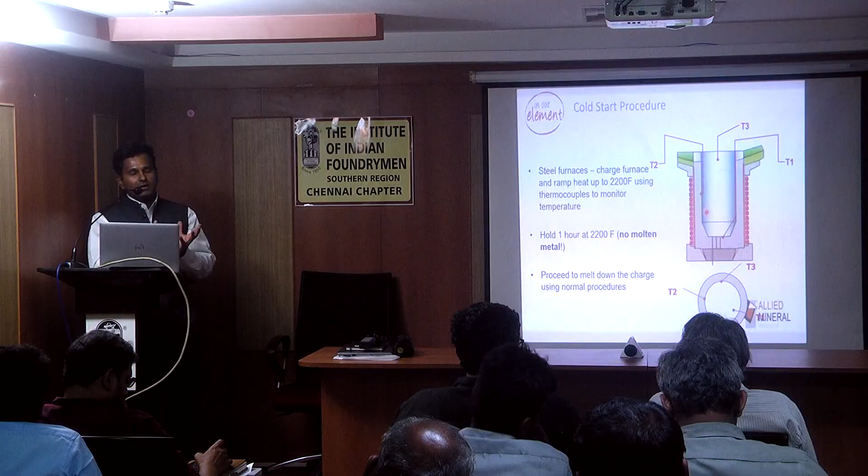For cold start also, you can place a thermocouple to understand the temperature. You can rapidly heat the furnace up to 1200 degrees Celsius, but before introducing and starting melting, you should allow 45 minutes to 1 hour so that the cold lining gets heat and tries to expand. This allows all the shrinkage cracks that have happened to get sealed before the metal fins.

Regarding scope of energy conservation in melting equipment, coreless induction has a major scope, which was already briefed by Mr. Anand sir. Transfer equipment, treatment, and pouring ladles are also an effective way of saving energy. I have 3-4 real life case studies to show how you can save energy.

In one of the ladles, the lining thickness is 75 mm, a fire clay based castable, directly lined onto the steel shell. The hot face temperature is 1450 and the cold face is 420 degrees Celsius, so the total heat loss is about 16,000 watts per meter square.

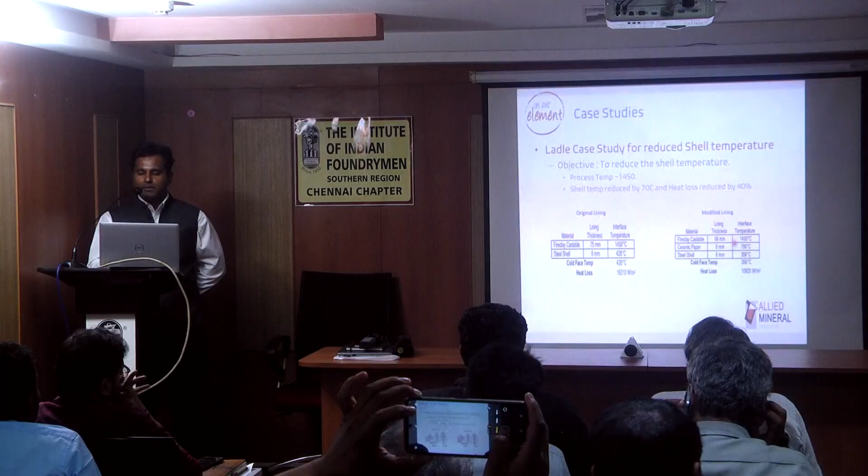By just introducing a 6 mm ceramic fiber paper, you can save up to 40% loss through the shell, and the cold face temperature has been reduced by 70 degrees.

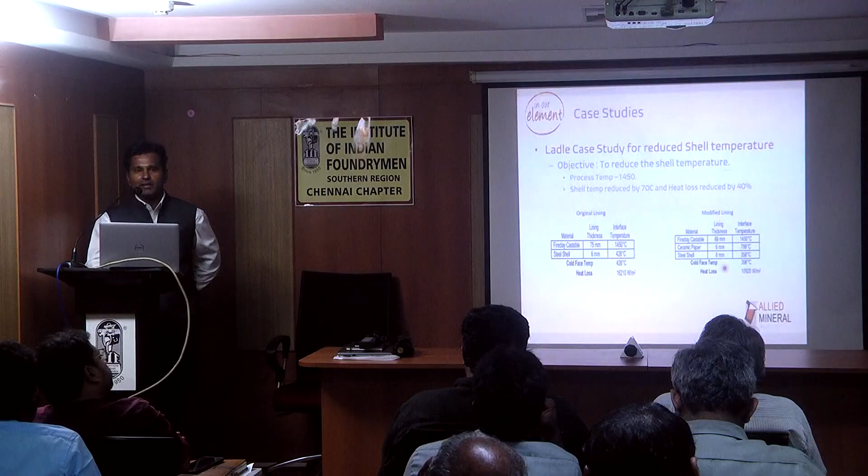During our visit, one of our foundries also emphasized introducing CF paper. Earlier they used a castable without CF paper and were losing heat very fast, having to reheat the ladle in subsequent heats. But after introducing the CF paper, heat containment was more, so they didn't need to heat the ladle for further heats. The heat was retained well.

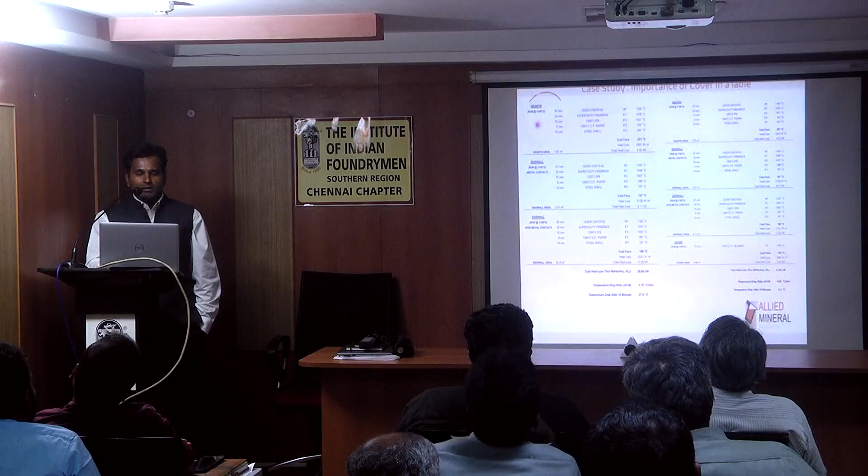This is another case where we ran a steady state heat analysis for inconel metal. Both sides remain the same: lining thickness, liquid metal temperature, and air emissivity all remain the same, except, as sir was saying, you cover your furnace, cover your ladle.

There was just an introduction of a 50 mm blanket, and you can see the drastic difference. Temperature drop after 10 minutes is 57.9 degrees without cover, but just 6 degrees with a cover for a 15-ton ladle. You can see how much energy can be saved in your induction furnace.

Generally the radiation losses are more than 70 to 80% compared to conduction losses, so we should target the radiation loss more than the conduction losses through the refractory. We also recommend having a proper refractory design for reducing the 30% loss through the shell as well.

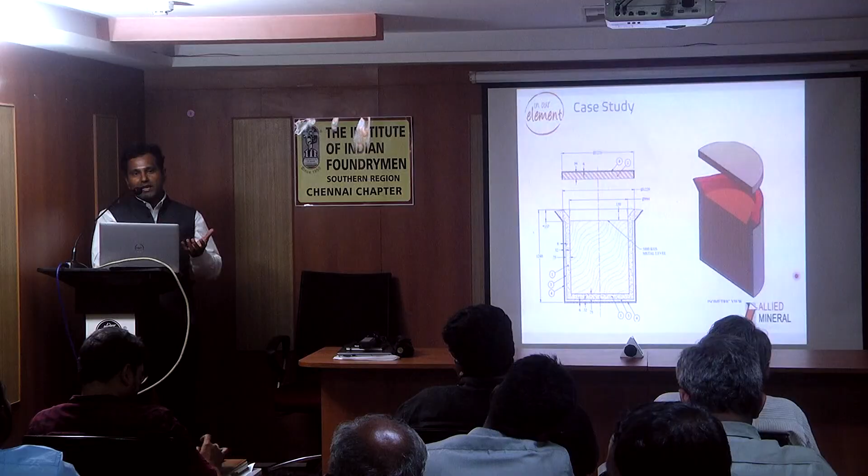There was one customer who had 10-ton and 5-ton furnaces but wanted to pour 15-ton of liquid metal, so he gave us a challenge to hold liquid metal in one 5-ton ladle for 1 hour.

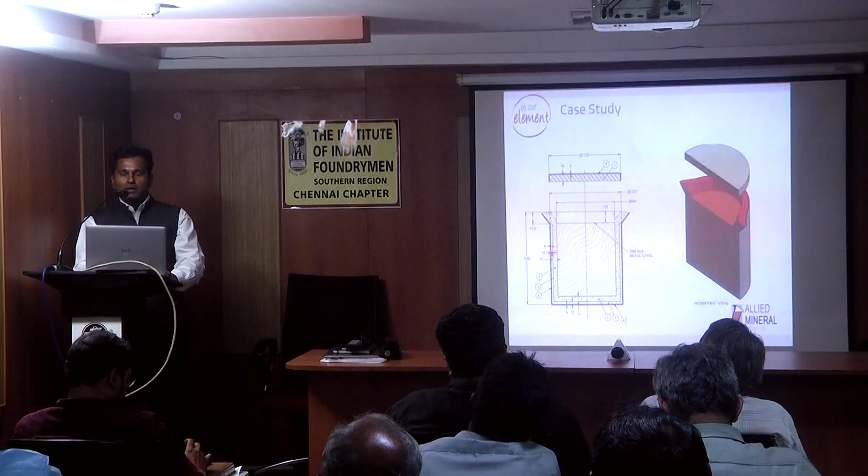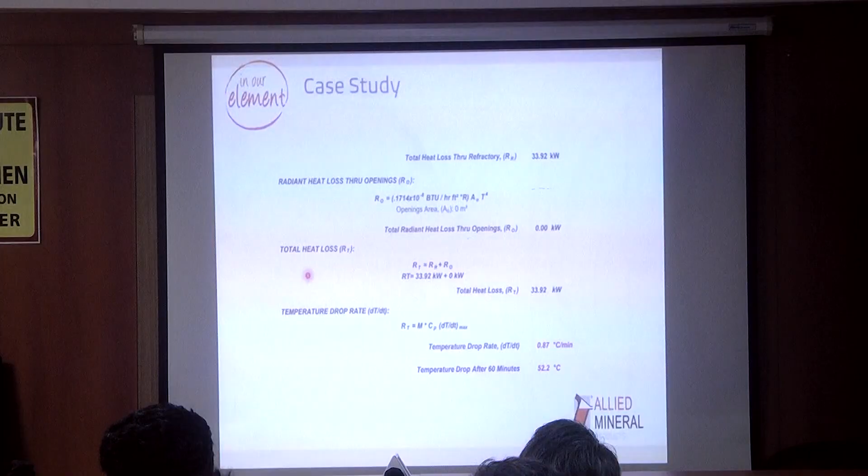This is the design we gave: 6 mm ceramic fiber paper and 32 mm insulation fabric, then 75 mm of castable lining with a 100 millimeter cover. This is the heat loss we calculated theoretically - heat loss after 60 minutes was given as 52.2 degrees.

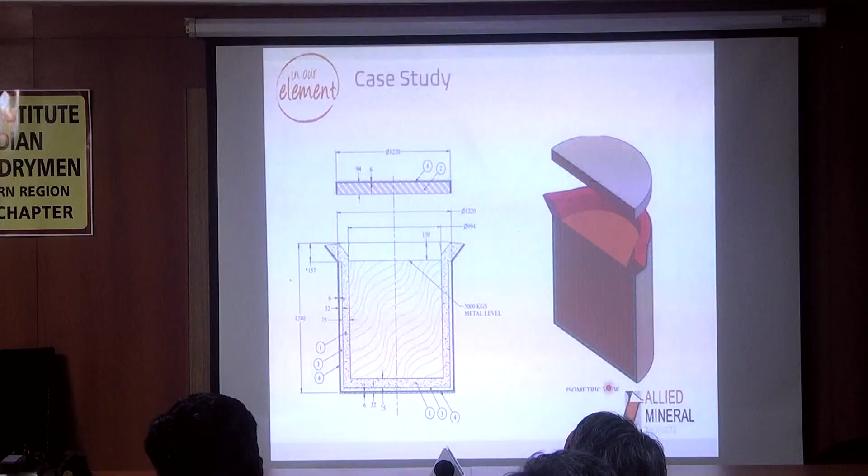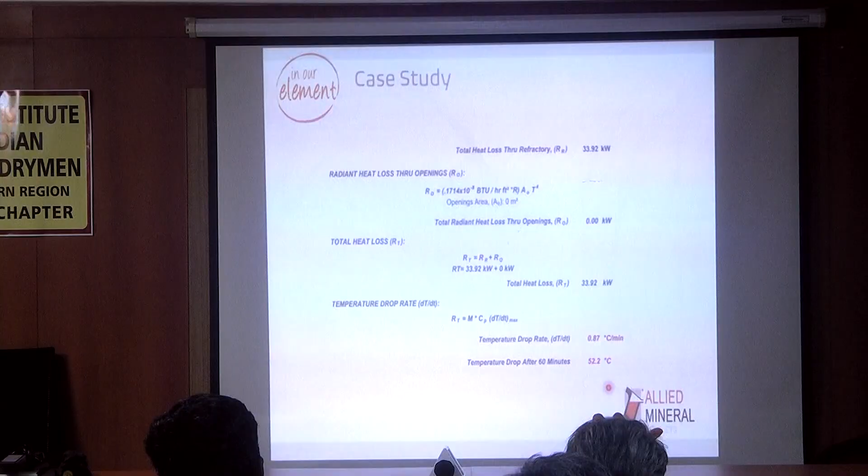Since the ladle was very big, they could not fabricate the cover according to the design. Instead, after taking the liquid metal, they poured perlite or rice husk on top. They achieved an 80 degree loss instead of 50 degrees - 30 degrees more loss than planned - but they still could pour the liquid metal after 1 hour of waiting in the ladle. They treated this ladle as a kind of holding furnace.

So that's all I have. If there are any specific questions, you can ask now, otherwise we can discuss during dinner. Thank you.

Sir, actually we go with temperature-based sintering instead of kilowatt-based sintering. We recommend 110 degrees Celsius per hour for silica ramming mass. At 900 degrees Celsius, depending upon your furnace size, we have to hold either 45 minutes or 1 hour. Then you can continue the same 110 degrees Celsius per hour, and reach around 1600 degrees by giving 1 hour holding at the final hold temperature. But based on our experience with larger grain size silica, you can go up to 150 degrees Celsius per hour, increasing the ramp depending on the grain size distribution.

During phase transformation, yes sir, that time the temperature will be held. During a phase transformation, it has to be held. That means the sintering time will be extended, no? Yeah, holding has to be given, but we can increase the ramp-up rate a little. Instead of 110 degrees, we can go up to 150 degrees Celsius per hour. That will reduce the ramp time, but holding has to be given at two places - one around 900 degrees, and one at the final holding to form the final phase transformation in silica ramming. In between, that 573 degrees...